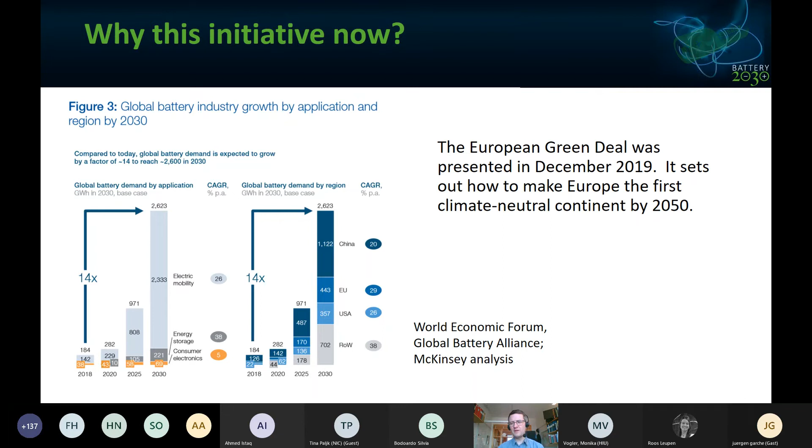The European Green Deal was presented in December 2019, and it sets out how to make Europe the first climate-neutral continent by 2050. This is a super ambitious goal, but we need to reach it, and this is a part of reaching the goal. This also requires that all these types of research activities around the European continent, and also looking out to what is happening in other places in the world, need coordination, and that we do things together and strive together to reach this goal. And therefore we need these kind of umbrella initiatives like Battery 2030 Plus.

So Battery 2030 Plus is a pan-European large-scale research environment that is working together to implement the goals that we have set out in a roadmap. The initiative today comprises 7 different projects, and it involves quite a lot of academy, research institutes, and also industry.

We have these 7 projects. We have BIG-MAP, which focuses really on the combination of computational exploration together with artificial intelligence and machine learning, and also connects this with key experimental techniques in order to create a platform for materials discovery acceleration, to better map and try to predict the behavior of novel materials that will be implemented in these future batteries. It's also connected very much to understanding the interfaces in the battery. BIG stands for the Battery Interface Genome, and the interfaces control a lot of the performance of the battery, but also the safety and the aging. Therefore it's vital to understand this, and this is something we foresee this project will bring.

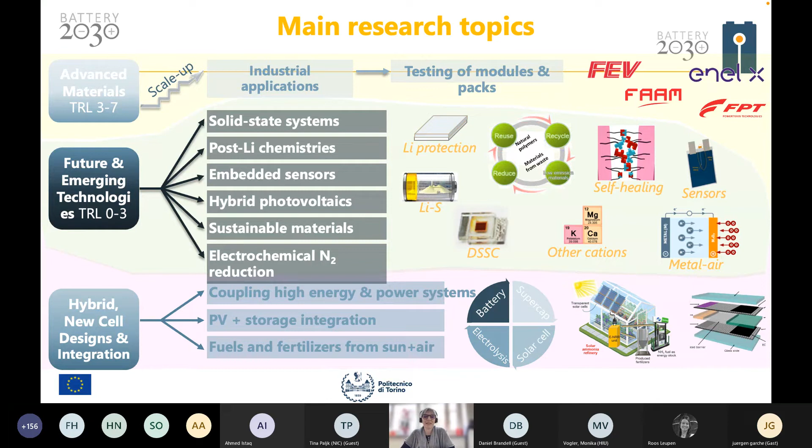We are more than 20 people now, and we are mainly working on advanced materials from TRL 3 to 7, so going from scaling up the production of advanced materials all the way to industrial testing, and also thermal testing and so on. And of course, a big part of our work is in new, future and emerging technologies based on solid state, post-lithium-ion technologies, hybrid systems, lithium sulfur, lithium air, metal air, and so on. And also, of course, as you can see here, self-healing properties of materials and integration of sensors.

Just to conclude, we have a task force at Polytechnic, which I'm proud to lead, as we have expertise across the whole field of engineering. We can cover everything from materials, nanosensors, new cell designs, to all modeling — for example, I'm also involved in Big Map and in several projects on modeling.

And then the integration, battery assembly, integration of batteries in electric vehicles, and also for stationary application, finally arriving to LCA and recycling. Good. So coming into the depth of this presentation, I'll just recap a few basic concepts, very simple basic concepts.

We have principally three different kinds of electrochemical power sources. The first are primary or voltaic cells. These are not reversible systems in which reactants can only transform into products, and there's no way to get them back by producing again the reactants, recharging the battery. So this is not a rechargeable cell, and when reactants are fully transformed into products, there is no other possibility to get additional energy.

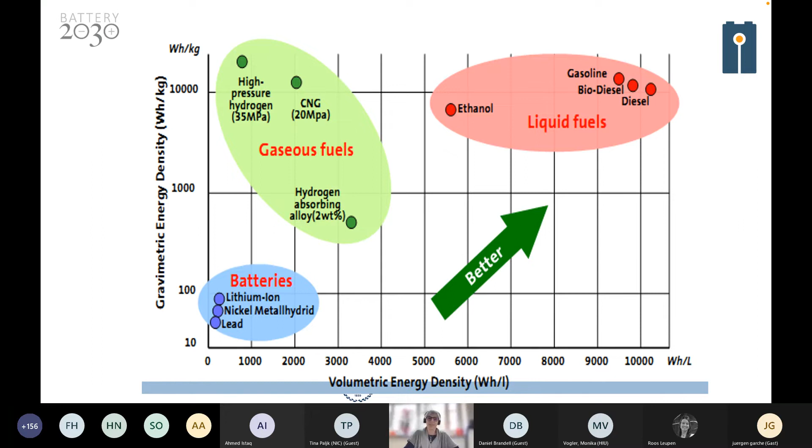So commonly, the main typical cells and batteries we are using are based on lithium. Why lithium? Lithium is the first metal in the periodic table, element number 3, and it's the lightest metallic element of the periodic table. It has a few important advantages: it is very reactive, but it presents the lowest standard electrode potential, -3 versus the hydrogen electrode, and a very huge capacity, around 3,800 milliampere hour per gram. If we compare the specific capacity and standard potential of lithium, you see there is no other cation that can compete with it.

Of course, then we have other issues related to abundancy and so on, which also can give opportunities to other cations such as sodium, for example, but also potassium, whose voltage is quite close to that of lithium, even if the specific capacity is lower.

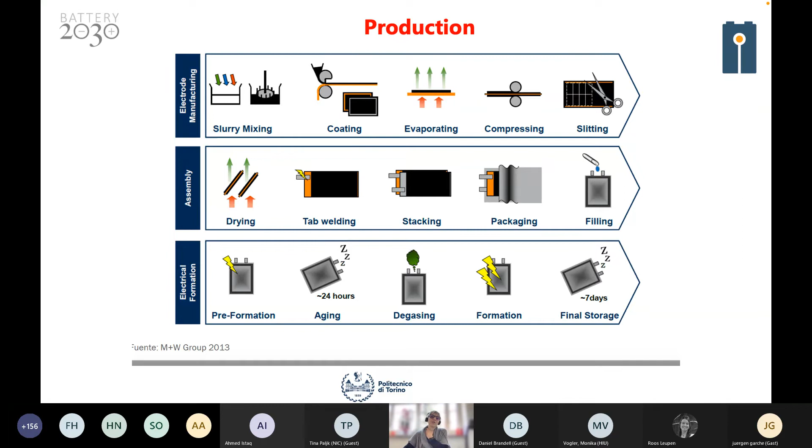Those aspects, even though I just passed through them, each step is really very important and has to be discussed and followed really carefully. So even in Battery 2030, there are a lot of activities in reducing the energy step by step, and rethinking the production of lithium-ion cells.

There are different formats. There are the pouch cells, the ones you already saw in previous slides, in which the electrodes are stacked one on the other. Or we have winding of the electrodes that are rolled around in a cylindrical cell, or finally in a prismatic cell. So there are different formats for different applications. For example, pouch cells are much softer and lighter in some sense. Cylindrical cells are harder due to the case, which is much harder. The same for prismatic cells, depending on the need, and we can have different formats, different distribution of heat during the working of cells, and so on.

Speaking about materials, in principle we have three main types of materials. The insertion materials are the most commonly used in lithium-ion cells. They can be homogeneous or heterogeneous. There are materials in which lithium intercalates inside the layers or inside the lattice of the cathode in a homogeneous or non-homogeneous way. It depends on the material of the cell.

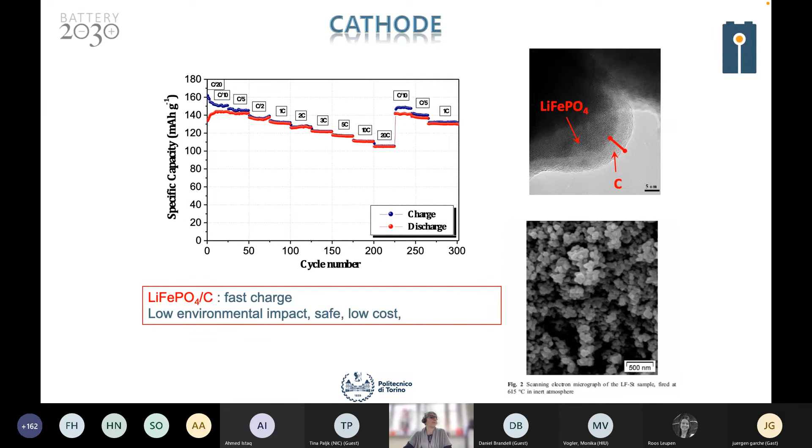So an example is LFP. If you can get a very good carbon layer, as reported here in this nano-sized lithium iron phosphate, you can also reach very high power, as in this case. This is a laboratory produced material, but you can reach 20C. And lithium iron phosphate works commercially very well up to 10C with no particular issues.

As Daniel already reported before in his lecture about Battery 2030, we commonly speak about different generations of materials, of cathode materials.

Now we are in generation 3 with the advanced lithium ion materials, so NMC with the introduction of silicon. We are going to go toward solid state with generation 4. And of course, generation 5 is beyond lithium ion, in particular conversion systems based on metallic lithium, and post-lithium ion technologies, as Daniel reported, like sodium, potassium, and multivalent systems.

I already told you that lithium is very interesting because of its very high capacity, but during cycling it forms dendrites that can be lost. So we have loss of capacity and also short circuit of the whole system.

For this reason, I already told about graphite that can be substituted, but we have to remember that during charge and discharge we have SEI layer formation, which is a solid electrolyte interface that forms always on the electrode surface. This happens in all anodic materials if they have very low voltage, and this is some capacity lost during the first cycle that cannot be recovered during cycling.

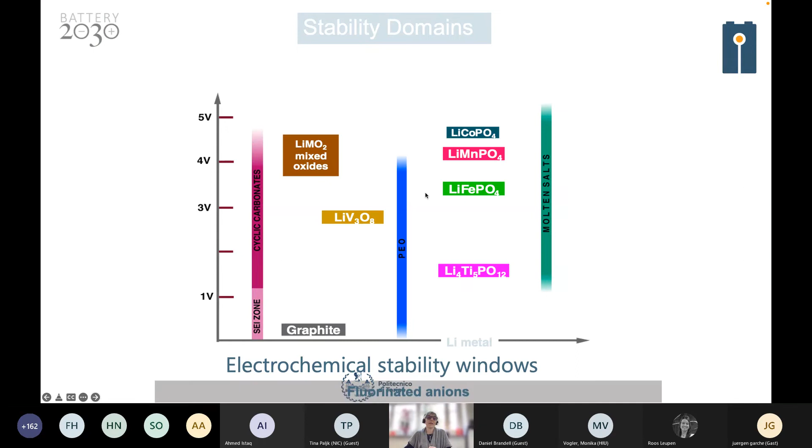So we have many issues related to liquid electrolyte, because of the need to get an electrolyte that can work properly and not decompose depending on the voltage. The higher the voltage, the better it is because of the energy density, but then the stability of the electrolyte cannot be enough. There are a lot of activities done in order to arrive at all solid state batteries, and I will be very fast and leave the floor to other discussions.

Why solid state? When we speak about solid state, we are again speaking about a very wide range of possible configurations: polymer, gel polymer, ceramic, inorganic ceramic electrolyte, but also mixing of all of them.

Why? Because when we eliminate a liquid electrolyte using solid electrolyte, we can use lithium as anode, so it will be protected, and this enables the possibility to increase a lot the energy density, but also you have a reduction of the volume of the whole cell.

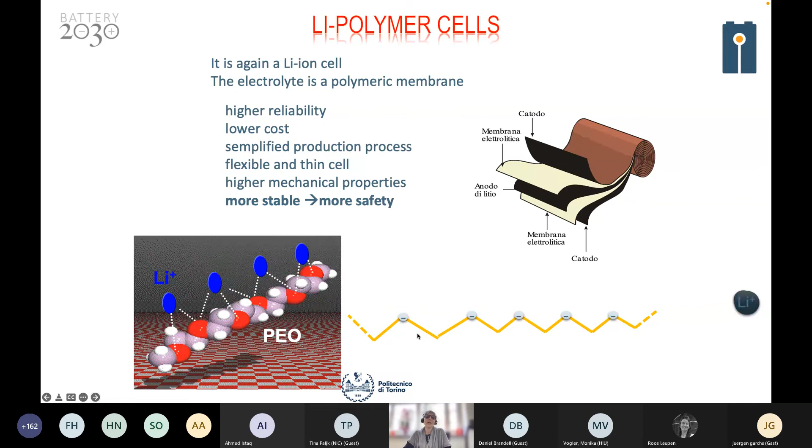That is very, very important for automotive applications, for example. Okay, we have no time to go deeper into how solid electrolyte works. It's commonly based on the presence of some electronegative centers that drive the movement of metallic lithium, of lithium ion, in the cell. Okay, so really going very fast into the second part.

If you have additional questions, of course, I will be very happy to discuss about it. I will leave here just the link to the Tesla battery day where you have additional information.

So just to summarize, I tried to give a very short and very fast overview about lithium-ion cell reaction, the main process in cell production, cathode, anode, and electrolyte materials, and finally, why and how to go toward all solid state.

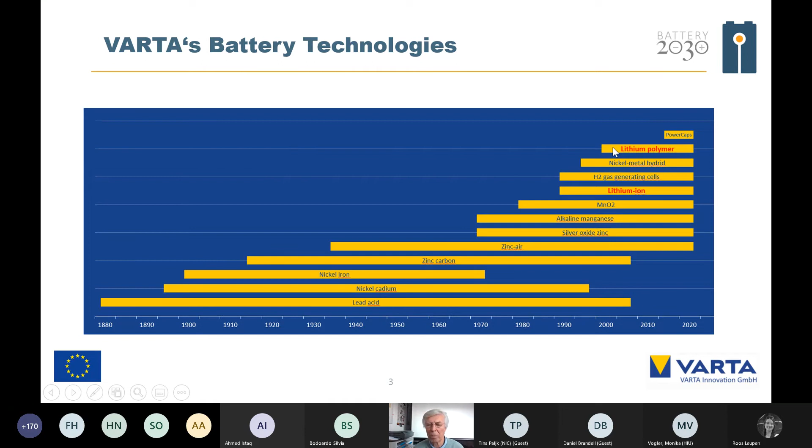Varta has been dealing a long time with different systems, starting 130 years ago with the lead acid battery system, and then in 1990 the lithium-ion battery system was included, and a little bit later also the lithium polymer system. Looking at the different steps of development from scientific research up to the product, the Varta innovation group or department in Graz is working in that area.

So the proven performance of large-scale and full-scale cells are moved then to the larger development, to the full production.

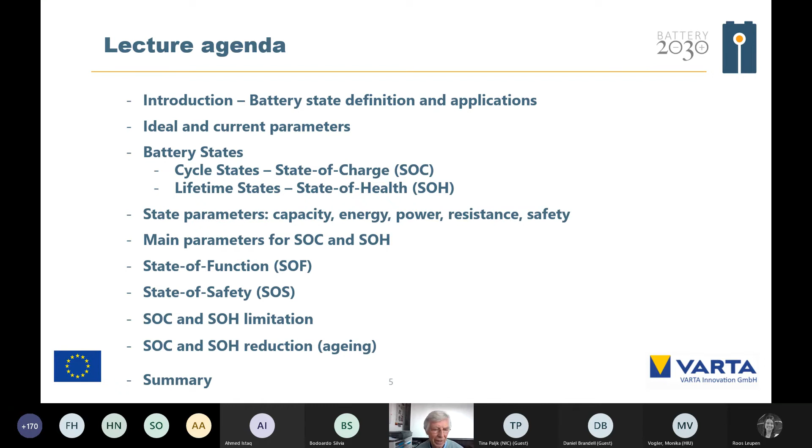The lecture agenda: a short introduction into the battery state definition, and then the battery states. Different states are related to cycles and to the lifetime. Then the question of which parameter we will use to reflect the different states, the capacity or the energy or the power and so on. Then we are coming to the state of function, a relatively new parameter, and the state of safety. Finally, we want to speak about the limitations of the state of charge and the state of health, and what is going on during the reduction of that state parameter, that means the aging, and finally a summary.

The battery state gives you information about the parameter state, and the parameter could be, for example, the capacity of the battery. We have two groups of states: the state of charge during one cycle, which gives you short time information, and the state of health, which is related to the whole cycle life, giving you long time information about the state of the battery.

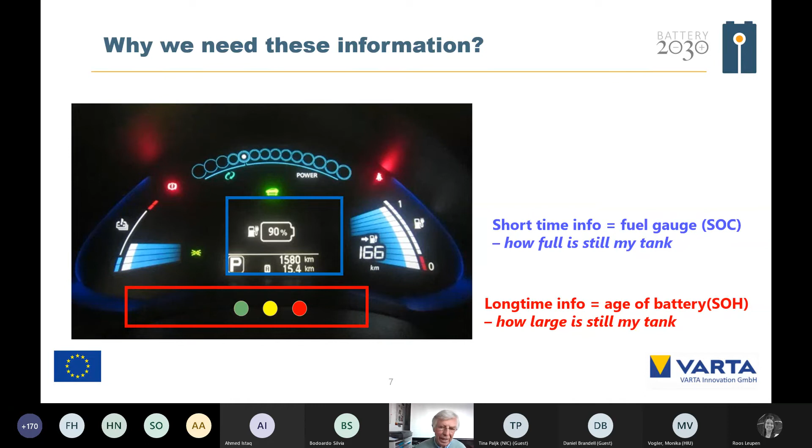Why do we need this information? For example, if you have the screen of your electromobile, you have the short time info, the fuel gauge, the state of charge, which answers the question: how full is still my tank? And then you have the long time info that gives you information about how large is still my tank. Both informations, the short time info (state of charge) and the long time info (state of health), are important for driving the car, and not only for the car, but also for other applications.

The battery state is a metric to evaluate the current parameter level in relation to its ideal state. The current parameter could be related to a cycle, that is the cycle state, the short time info, or to the lifetime, so lifetime state, long time info.

The ideal state could be related to measured values of a fully charged cell, or to a so-called nominal value, which is given by the manufacturer. That is the difference between the ideal state in the cycle, where you measure the value, and for the lifetime value, where the ideal state is given by the manufacturer.

Let's have a look at the short time state. During one cycle, that is the state of charge. That is the ideal value of the fully charged cell, 100% state of charge, and then you have the discharge, and then the charge again. So the ideal value is the measured value at that state, the full charge at the beginning of the discharge, or at the end of the cycle before.

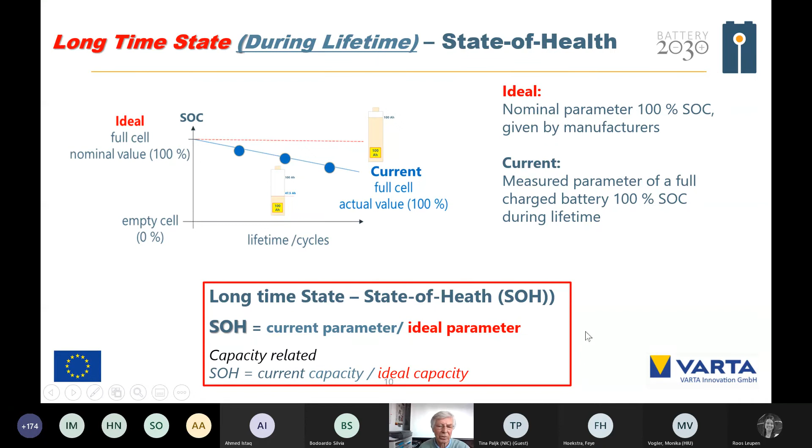So let's come back to the nominal capacity. I mentioned that capacity is given by the manufacturer. That value is based on the experiences of the manufacturer with many cells. He has a lot of experience, measured a lot of capacities, and the average of that measurement he calls nominal capacity, or also labeled capacity or given capacity. So that's the value you're looking at in the prospectus, and then you see I could buy a cell with 100 ampere hour capacity, for example.

But that nominal capacity, given by the manufacturer, is not in every case the same as the measured capacity, the real capacity. One cell could have 95 ampere hour real capacity but is still labeled as nominal capacity 100 ampere hour. The second cell could have more capacity, for example 105 ampere hours, but is also still labeled by 100 ampere hour.

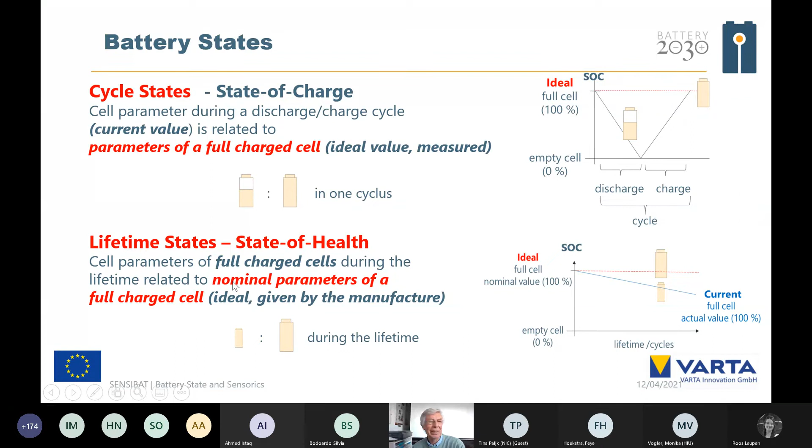And in order to avoid problems with the measured capacity, the long time capacity is related in the ideal state to the nominal capacity given by the manufacturer. So again, for both states: the cycle state, for one cycle, the ideal parameter is in the full charged cell, and that is measured. The state of charge is the value of the parameter during cycling, during discharge and charge, related to the full charged cell. And the lifetime state, the state of health, the ideal parameter is the nominal parameter given by the manufacturer. So the question is which parameter we use to characterize the cell.

For example, during discharge you could measure the capacity, the energy, the power, and the resistance. The same is with the long time state. You have to charge the cell, and then you could measure the capacity, or the power, or the energy. So let's have a look at the cycle state. We could have here the measurement of the capacity, the energy, the power, and the resistance.

In nearly all cases, for the characterization of these states, let's say 50% state of charge, we use the capacity. And therefore, if we are speaking about the state of charge, that means in nearly all cases the state of capacity. That means state of charge practically means state of capacity. So the state of capacity gives you the information about the currently available capacity in relation to the measured capacity of a full charged cell. That means that point.

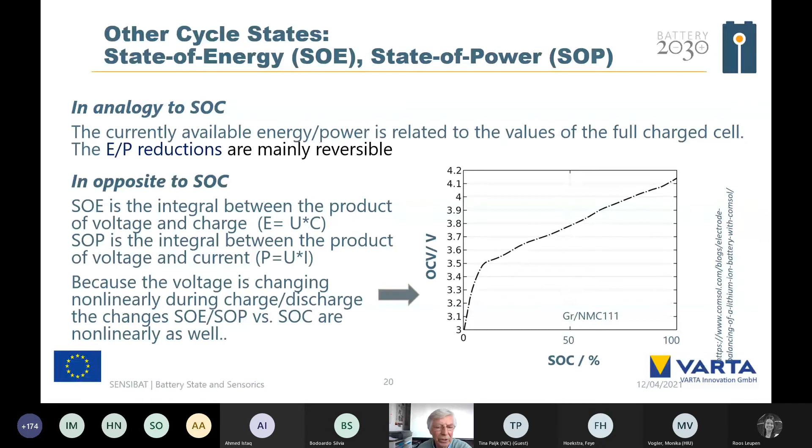So the lifetime state, that means the state of health, is the value to evaluate the health, let's say the aging, in relation to its ideal state. Like with humans, we have different explanations for health. You could look at the skeleton, the blood, the nerves, and so on. And the same we have here for the cell. We have different indications.

Oh, sorry. Oh, moment.

We have different indications for the health. That could be the capacity via the lifetime, the energy, and the power and the resistance. So it's the same as the cycle state. We have here the capacity related to lifetime, the energy, and so on. And also here we use as a parameter to characterize the state of health, the capacity. So also here in the lifetime state, the state of health is practically mostly the state of capacity.

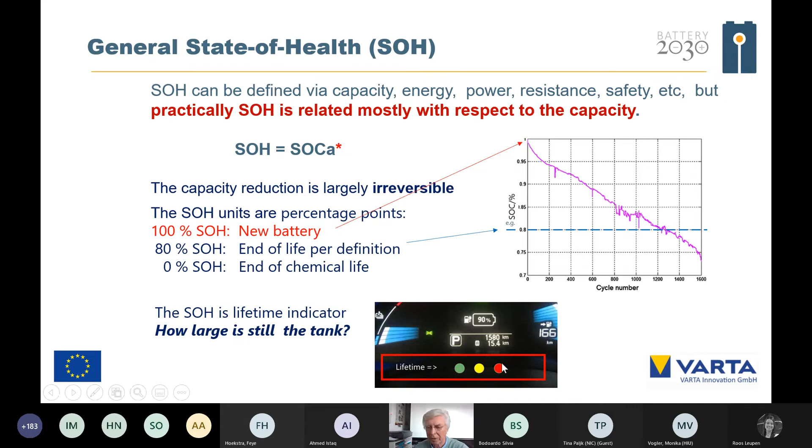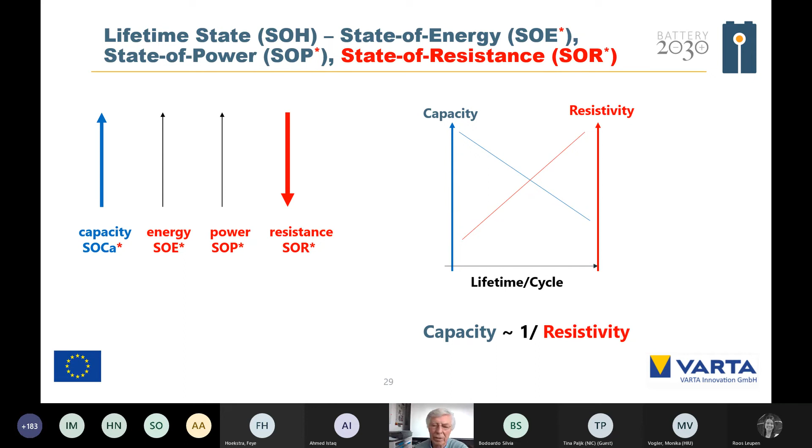So, of course, we could also have other states: state of energy, state of power, and also state of resistance. Sometimes state of resistance is used because, not for all, but for layered materials like NMC and NCA, we have a relation of the capacity to the resistivity, to one divided by the resistivity.

So then a so-called state of function is introduced. State of function combines the state of charge, meaning the capacity during cycling, and the state of health. That state of function answers how big is still my fuel tank and how full is still the fuel tank. In other words, how many kilometers I can drive with my car. So the state of function does not differentiate between the capacity decreasing during one cycle and the capacity decreasing related to aging.

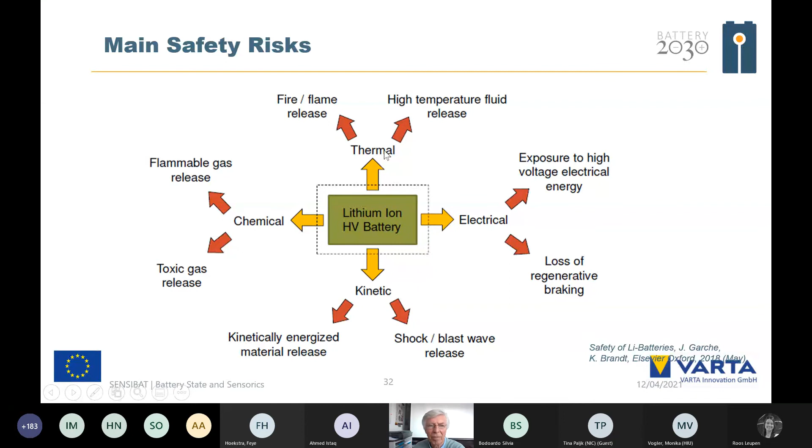So then a so-called state of safety is also introduced. We have a lot of safety risks. I will give a later lecture about safety, and you will see we have electrical, chemical, thermal, and so on risks. The problem for the state of safety is the quantification of the state of safety.

State of safety is used often in the literature, but never defined exactly. There are operation parameter limits which are not to be exceeded, for example the operation window for temperature or for charge rate, and you should not go outside that operation window. Based on those limits—temperature, charge rate—a function could be developed for that state of safety. There's a good publication in the Journal of Power Sources about this.

So, are there any limiting values for state of charge and state of health? Yes. For the state of charge, that depends on the battery chemistry, but normally you should not go deeper in discharge than about 20%. The end of discharge would be here at 80%. Why are we doing that? To stop the discharge here, to increase the lifetime. If you go deeper toward 100% discharge, then the lifetime decreases exponentially.

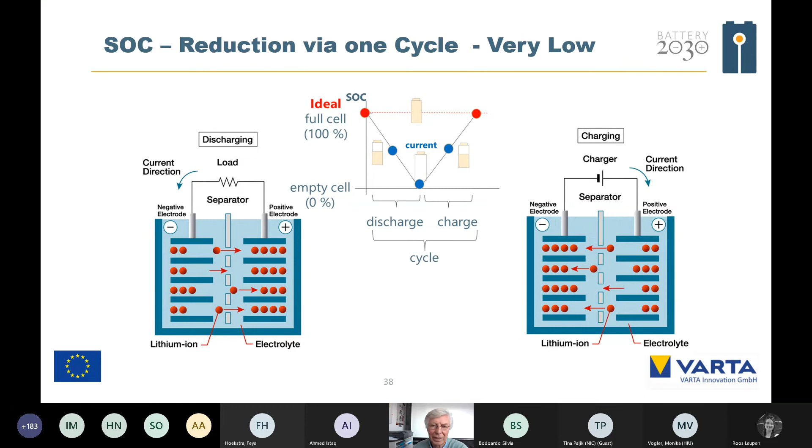And then the last question: reasons for battery state reductions. In the state of charge, normally the reduction of capacity via one cycle—going from that point to that point—is very low, so the changes during one cycle are nearly reversible. That is not the case for the state of health; the reduction over the lifetime is relatively higher compared to the state of charge. The reasons for state of health reductions are the loss of lithium, active mass losses, and reduced charge mobility. I will speak about those reasons in about 30 minutes.

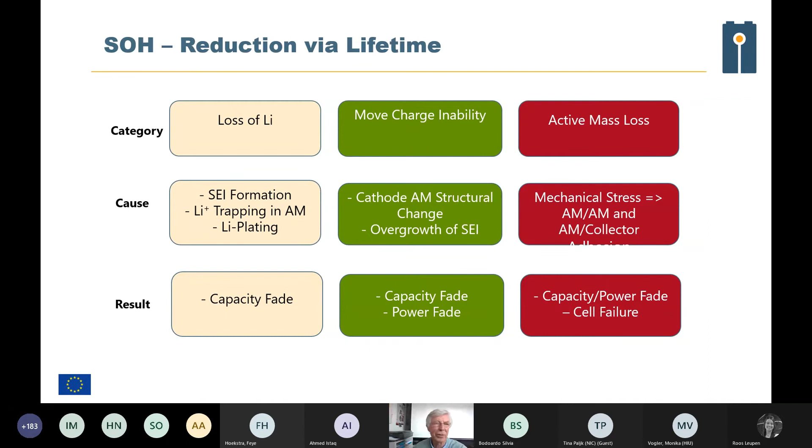Summary: we have the cycle states, short time, mainly state of capacity, which gives the relation between the measurement parameter in the partial charged state, lower than 100%, in relation to the ideal state, which is the measurement parameter of the fully charged battery. So the question was: how full is the tank?

And then you have the lifetime state that is also related mainly to the state of capacity. That is the current parameter, the current capacity of the full charged battery to the ideal state. And then we have the combination of the state of capacity, the state of charge, and the state of health as the state of function, which gives you the kilometers you could drive, and finally also a state of safety.

Thank you for your attention, and please see in September we have in Graz the 4th Graz Battery Days, tools to tackle the challenges of lithium-ion battery technology, mostly related to sensor topics.

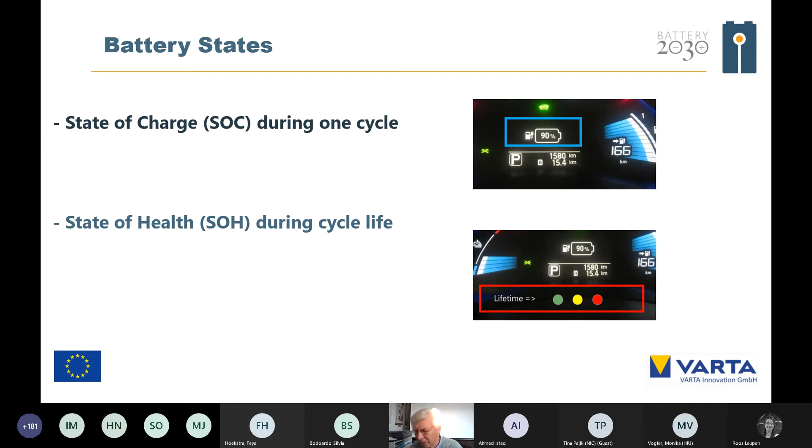As we discussed already in the lecture before, the state of charge during one cycle and the state of health during the whole cycle life. During one cycle, practically we have only reversible changes. I mentioned practically, you have no changes in the capacity during one cycle from Cx to Cx plus 1. Of course you have minimal changes, but practically you could not see the changes during one cycle.

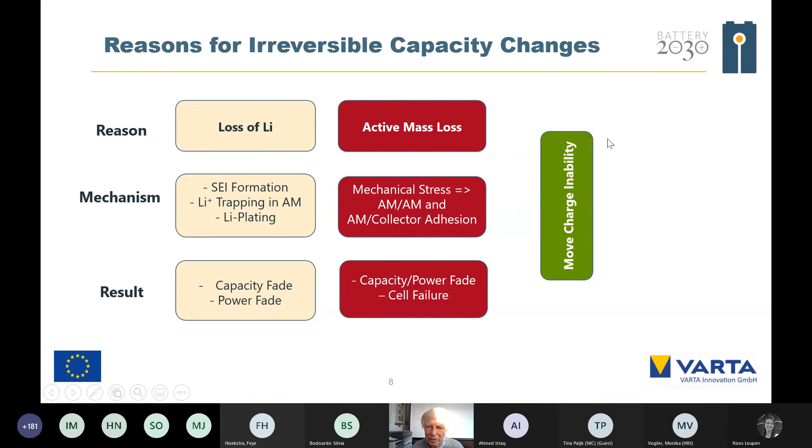So the other state, the state of health, all the changes during the lifetime or the cycle numbers, are irreversible. We have 3 groups for that, and I will discuss only the loss of lithium and active mass losses, and not the move charge inability. We could do that in the discussion, for example.

So the reason for capacity fade and power fade is the loss of lithium in the system. We have two reasons for that, two mechanisms: the SEI formation and the lithium plating. Now I will address the SEI formation.

Starting to understand what is going on with the electrolyte stability, with the well-known example of water. You have two platinum electrodes, and if you go to the lower potential at about 0 volts, hydrogen is generated. In that region, the water is unstable, and going in the positive direction at about 1.23 volts, the water is oxidized to oxygen. So only in that region do we have the electrolyte stability window.

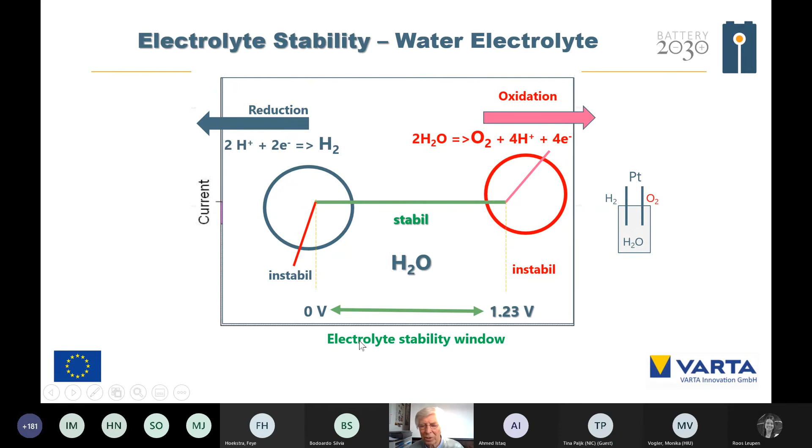That is for water, but we could take the same model or experiment also for our lithium electrolyte, the LiPF6 alkyl carbonate, with two gold electrodes, and we have nearly the same behavior. Going in the positive direction, the electrolyte is oxidized, and going in the negative direction, the electrolyte is reduced. So where we had 1.23 volts for water, here we have nearly a 4 volt electrolyte stability window. That means we have two areas for the stability: the electrochemical window between 1 volt and 4.5, 4.3, or 4.6, depending on the electrolyte.

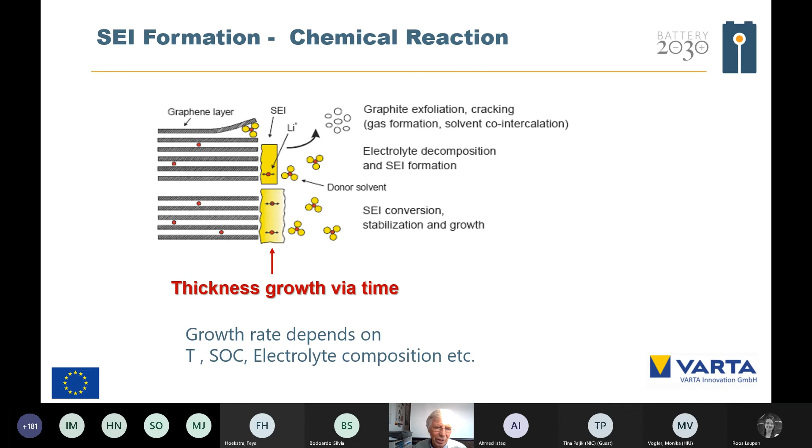By trapping of lithium in the SEI, you could see lithium fluoride, lithium oxide, lithium carbonate - that lithium is trapped, no more free to transport from the anode to the cathode and vice versa. That brings you a capacity reduction. And the increase of the thickness of the SEI leads to an increase of the resistivity of the whole system, which means you also have a power reduction caused by the SEI.

If we have no lithium between those layers - all lithium is outside - then the structure collapses, the layers go together. So we need a part of the lithium as the so-called structure-stabilizing, and the other part is the capacity-forming.

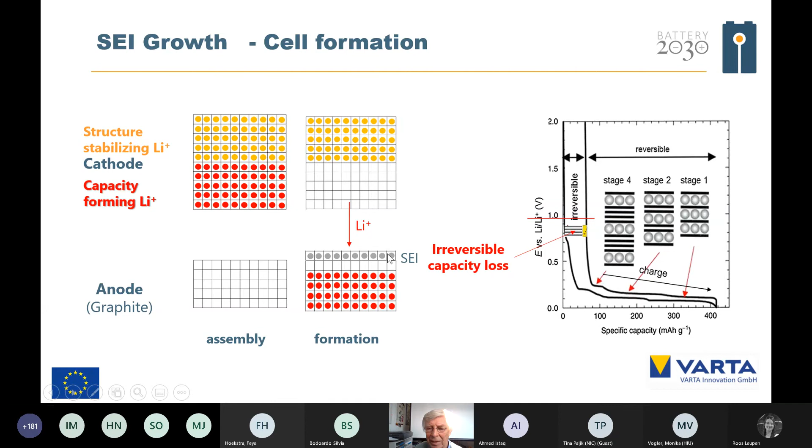If you look at the first charge, that is the empty graphite electrode - you charge it, you come down, and then you go back to discharge it. You have here the so-called irreversible capacity loss, and that irreversible capacity loss is the SEI formed during the formation process.

But during the lifetime, because that is a chemical reaction - and I mentioned that layer is growing independent of charge-discharge - we get a larger and larger SEI, and that means, in parallel, a capacity reduction.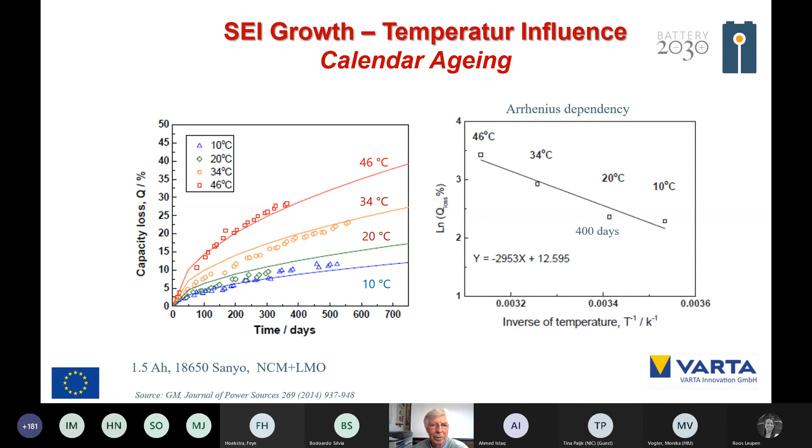And then we have also a third influence besides the temperature and the state of charge: the manganese deposition into the SEI. That is in the cathode. You have manganese 3, for example in the NMC, and especially in case HF is developed from the conductive salt, you have a disproportionation. You have a general disproportionation, but in presence of HF, the disproportionation goes much faster.

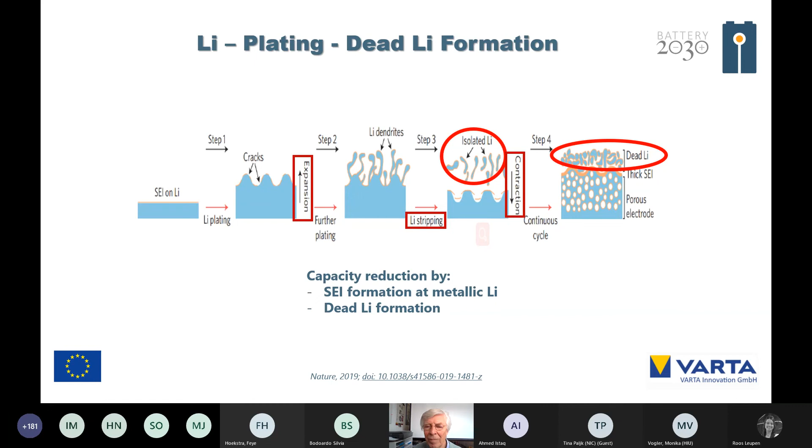On the left side, you have the increased current, or the charging time to 80% state of charge, in minutes. So 10 minutes, that is a very high charge current. And here you have a line. On that side, you will find lithium plating, and on the other side of that curve, that is lithium plating free.

So, for example, if you want to charge your battery in 30 minutes, about 2C, you need to charge your battery at at least 40 centigrade. So if you want a 20-minute charge, your charging temperature should be 50 centigrade.

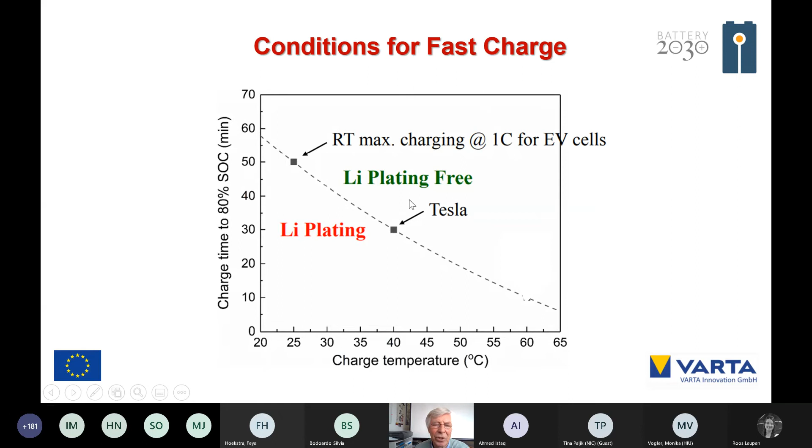And that is exactly what Tesla, for example, is doing to avoid lithium plating. Just before you fast charge the battery, your software is heating up your battery to about 40 centigrade, and then you could charge it with the high charging current.

So that lithium which we have seen is also trapped lithium, and that reduces your capacity.

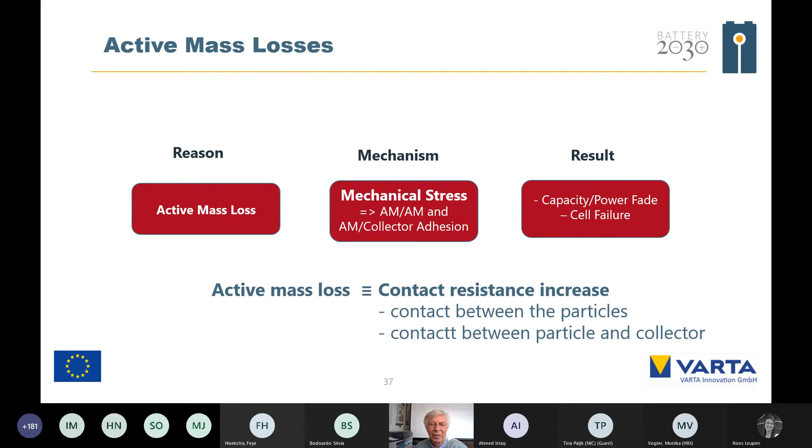So now let's come to the active mass losses. The active mass losses are coming normally via the contact resistance increase. So you have a mechanical stress inside, and that mechanical stress then reduces your contact between the particles, and not only between the particles but also between the particles and the collector.

And also that mechanical problem is well known with the lithium silicon alloys. Silicon has been mentioned to have a high volume change in case of charge and discharge. That is the volume for the charged one, and that is for the black one, for the discharged one, and that for the charged one.

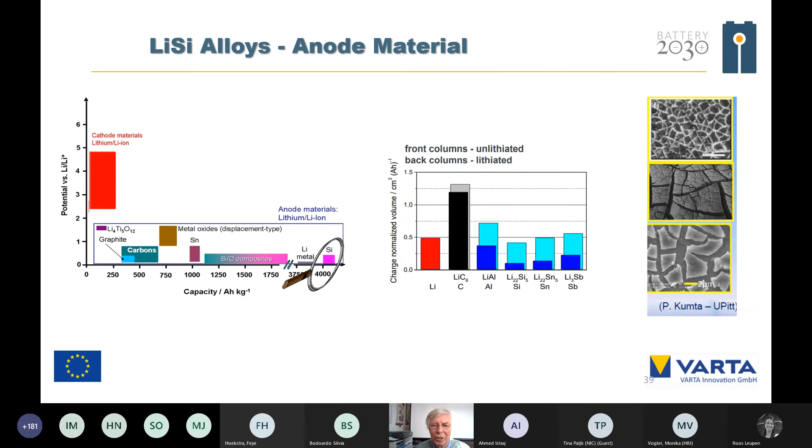For the graphite, the difference is only 10%, but look for that, for the alloys the difference is about 40%. So, after some cycles, you have an electrochemical milling, so you have no more contact. That is active mass loss.

That is an example for the lithiation of a silicon. What you see here is a silicon. You could see the lithiation of the silicon, the increase of the volume, and that will bring you a higher volume and mechanical problems.

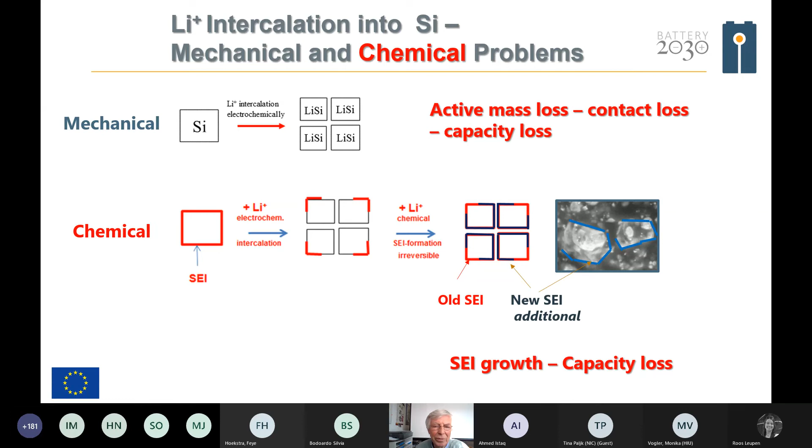Besides the mechanical problems, which lead to contact losses and capacity loss, you have also chemical problems because you create a new surface which is not covered with the SEI. So you have to form a new SEI after the charge of the silicon, and that new SEI means again capacity loss.

So you have practically no volume change. So you have low pressure on the separator, and that is a very stable structure in the LFP, and you have longer cycle life in that case with LFP batteries.

So, if you look, for example, at the lifetime of LFP cells and layered material cells, you could see the advantage of the LFP, which compensates all those volume changes from the anode and the cathode, and that is not the case for the layered material.

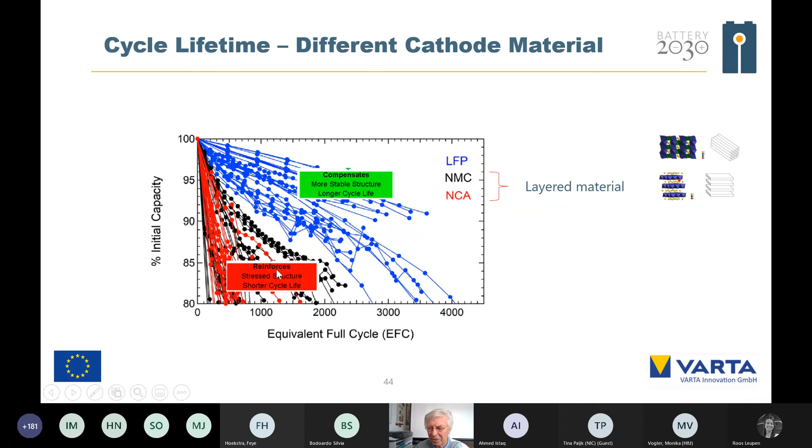So then a short introduction to the layered material in charge and discharge. The discharged material has a lot of lithium between the layers, and if you charge it, then you de-intercalate the lithium from that structure. So you have lower lithium ion concentration.

And as expected, if you take out delithiated material more than in that case, the structure could collapse. But you could try it. And if you go to higher charge potentials, you could see that your capacity is increasing. But the end of charge, 100% state of charge, is given by definition, not by physics or chemistry.

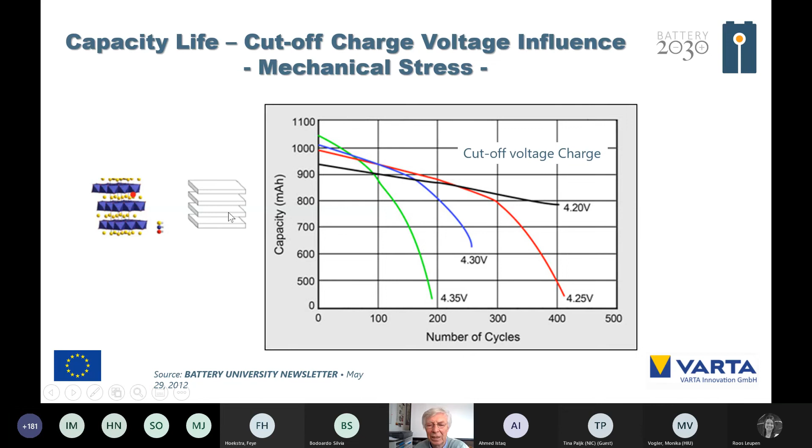Because if you are going to higher values or higher de-intercalation, your structure is no more stable, and the lifetime is decreased. Therefore, all experts give us the upper charge voltage, for example 4.2 volts. If you go to higher values, you are using a part of the structure stabilizing lithium as capacity-forming lithium. You get a higher capacity, but lower lifetime, because the structure starts to collapse if too much lithium is de-intercalated.

Now a short information on the temperature influence. The lithium trapping, mostly the SEI formation, is increasing with increasing temperature. Here you see the logarithm of the aging rate. By our knowledge of the Arrhenius law, we could expect the aging rate to decrease if we go to lower temperatures. That is the expectation, and we know the SEI formation follows that direction.

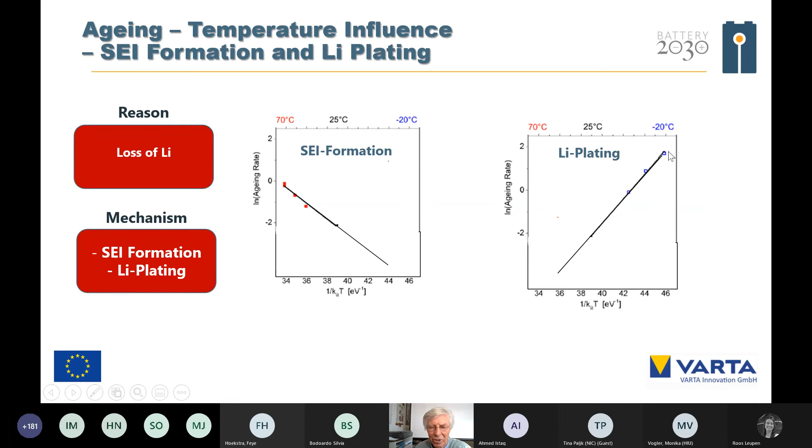But the lithium plating, we know, at low temperature we have very high lithium plating going in the other direction. So altogether, for the influence of temperature on the aging rate, we have a minimum, formed on one side by the SEI thickness growth, and on the other side by the lithium plating. So we have to keep in mind that there is an optimal temperature range where we have the maximum cycling life. If you go to deeper temperatures, the cycle life goes down, and also at higher temperatures.

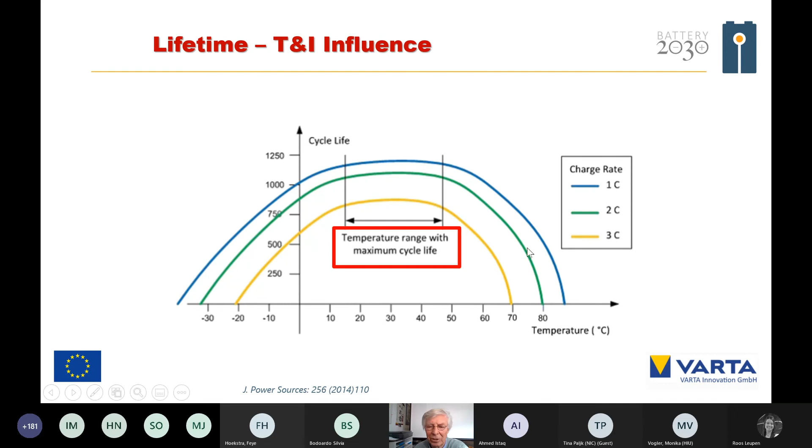Here you have a combination of temperature and high current in the different degradation mechanisms, which you could read here. I don't want to go too deep into that mechanism, but we have the three degradation modes: the loss of lithium, the loss of active material, and capacity loss and power fade.

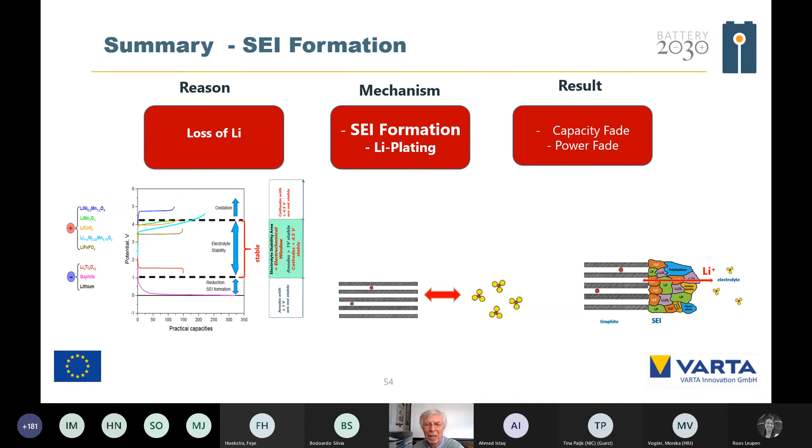In summary, we have the loss of lithium by SEI formation outside of the stability window of the electrolyte, and we have lithium plating if we come with our charge potential lower than the lithium electrode potential. That lithium plating leads to dead lithium and reduced capacity. For active mass losses, we have mechanical stresses in two different systems: systems with low stress, like LFP, have a longer lifetime, compared to systems with higher stress, like the layered materials NMC and NCA.

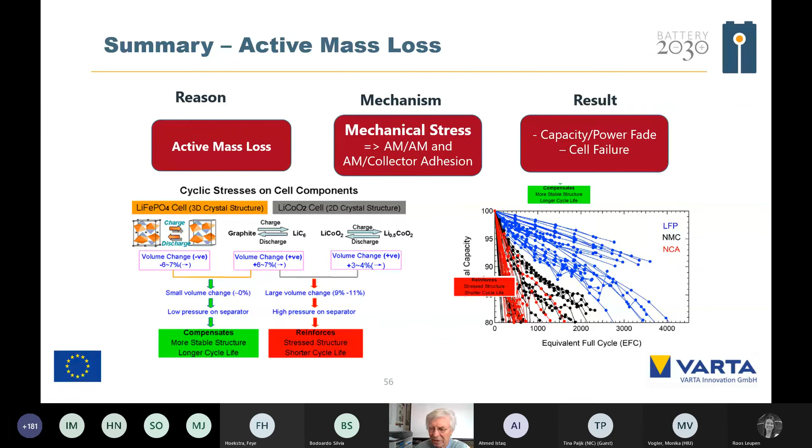So, summarizing the temperature influence, you could see here it is not as we expected. Low temperature could be very good for aging—no, this is not the case, caused by lithium plating.

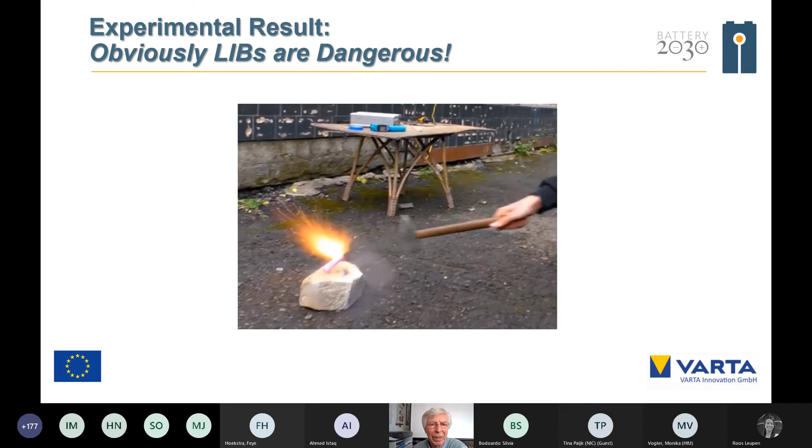What we learned, obviously, is that lithium-ion batteries are dangerous if you do that experiment, of course. I learned that at one of the conferences, a leading person asked: is the lithium battery a controlled bomb?

If you look at the energy density of TNT and the energy density of a lithium-ion battery, it's not too high in specific watt-hours per kilogram, so we are in the same region as TNT. But don't worry, chocolate has much more energy than the lithium-ion battery and TNT. So you notice: high energy densities do not pose an inherent explosion risk.

In general, we have to say lithium-ion batteries are dangerous, but only outside of the operating window, which I mentioned already. You have the standard operating windows given by voltage, current, temperature, state of charge, and that is relatively well controlled. Then you have environmental factors—water, mechanical forces, high temperatures—which are poorly controlled, like mechanical forces from accidents and so on. So here we have such operational design failures.

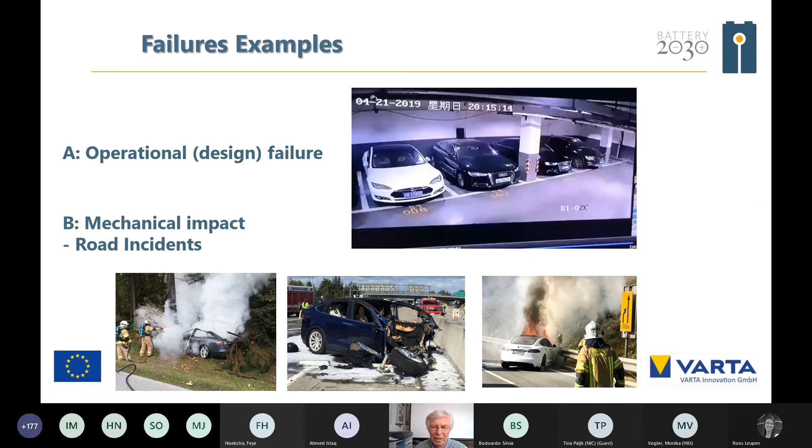And then we have the mechanical impacts, the road incidences. We know that from Tesla, and not only Tesla, also other incidences. But the question is, what about the internal combustion engine cars, the gasoline, diesel, and so on?

In the States, every 2 minutes there's a car fire. In Germany we have about 70 internal combustion engine car fires per day. 40% is the electrical installation, 40% is related to the engine, and 20% in Germany is vandalism. Maybe in France it's a little bit more, but about those 70 internal combustion engine car fires, you would not read every day about that in the newspaper. But if one electric car is burning, then you could read that.

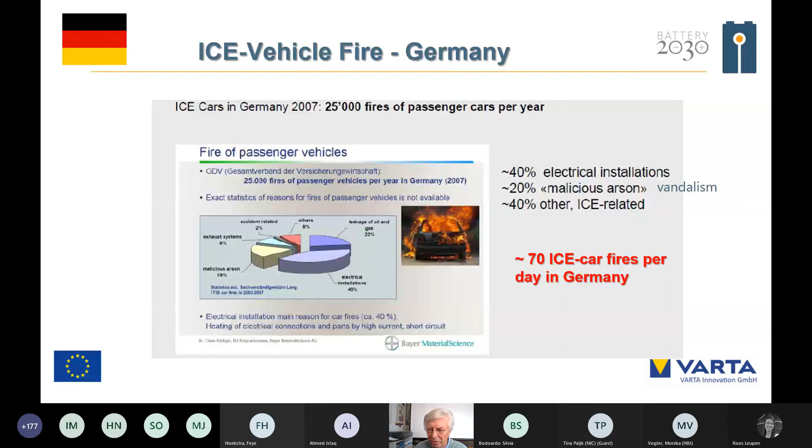So in general, I have to say, the lithium-ion cells are safe as long as you are working in that operational window. The incident rate is lower than 0.1 ppm.

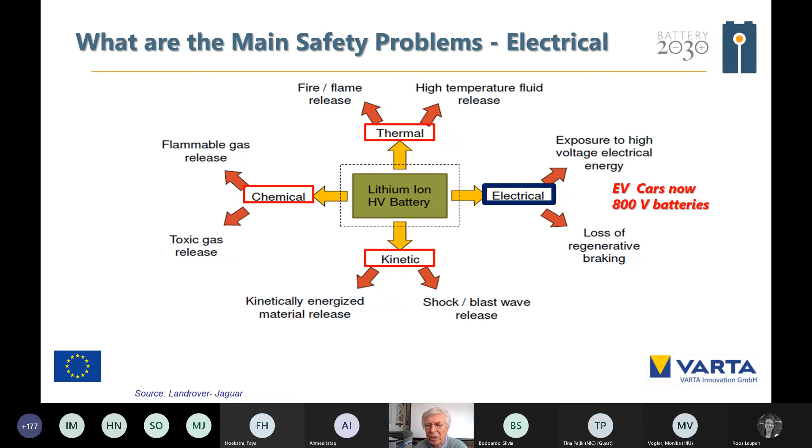What are the main safety problems? You have seen that already. You have the electrical problems. Electric vehicle cars now have 800-volt batteries, for example.

the energy density of the chocolate is much higher. The question is why? There is a so-called Berthelot-Roth product, which gives you information about the explosion risk. And that Berthelot-Roth product is proportional to the gas products, to the volume of the gas products which are developed during that accident, multiplied by the reaction enthalpy.

And here we have different examples. Lithium with the inorganic electrolyte, lithium cobalt oxide, and number 5, that is black powder. And here we have the explosion limit.

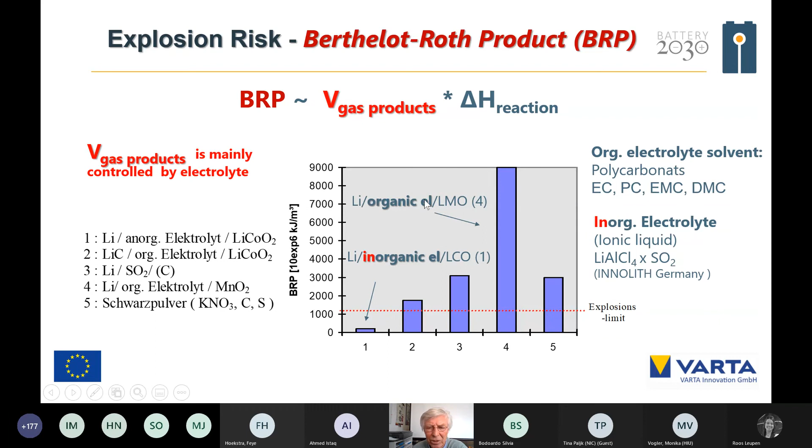I will address 2 examples. We have the lithium organic electrolyte, LMO, with that very high product, and the lithium inorganic electrolyte. That inorganic electrolyte is the ionic liquid with lithium tetrachloroaluminate, and the SO2 ionic liquid is produced in a demonstration by INNOLITH in Germany. And you could see the inorganic electrolyte does not develop so much gas volume like the organic electrolytes, the polycarbonates.

Therefore, the explosion risk of that organic electrolyte is much higher than the explosion risk of nearly the same cell with the inorganic electrolyte. And the explosion risk caused by low gas volume is like the chocolate, because the volume of gases is very low in the reaction phase.

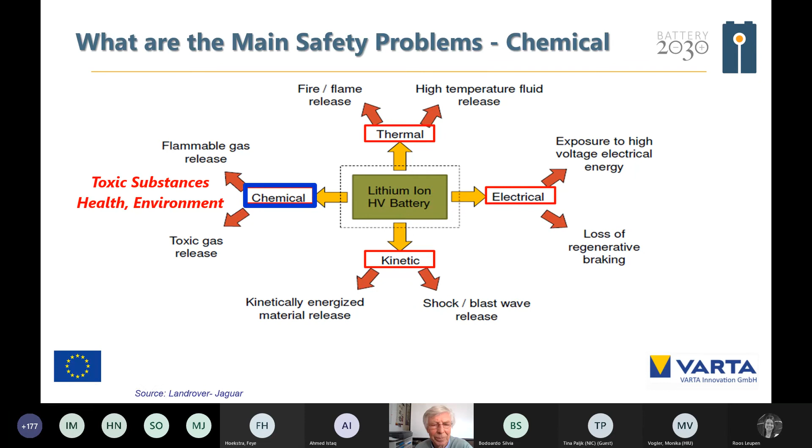So the third hazard is the chemical hazard, which is related to toxic gases, toxic substances affecting health and environment. So the main chemical risk is coming from the electrolyte. And we have 3 cases.

We have a cold leakage, that would be a leak at low temperatures. What we could see here, we have HF formation. And then we have high temperatures, but no fire. So we have gas development and cell pressure, flammable gases, toxic gases. The vent opens, controlled.

And then we have case C, that is fire. The container is opened, mostly uncontrolled, and gases ignite. And toxic gases, the CO, HF, those are the hazard gases. So that would be an example for that one.

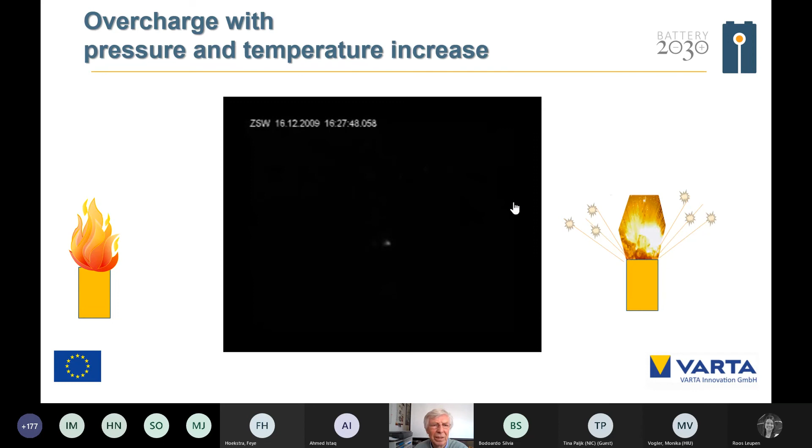The pressure is increased in the overcharge, and you could see that here. And finally, after the fire, you have the explosion.

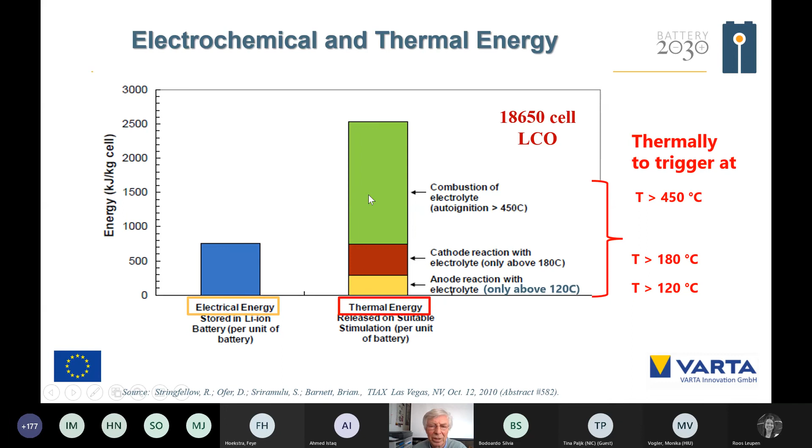The electrical energy could be converted, in case of a short circuit, into heat as well. And if you are looking at specific heat capacity and specific energy, you have a relation of about 720 Kelvin. That means a 1% state of charge loss in the short circuit increases cell temperature by 7.2 K. And if all electrical energy is reacted, then you have a cell temperature increase of 720 K. That is under adiabatic conditions.

That is not realistic practically, because you also have thermal actions. But that short circuit reaction of the electrical energy heats up your cell, it acts like a lighter. The energy created by that lighter heats up the cell temperature, and then the chemical reactions are triggered at a temperature of 120 centigrade.

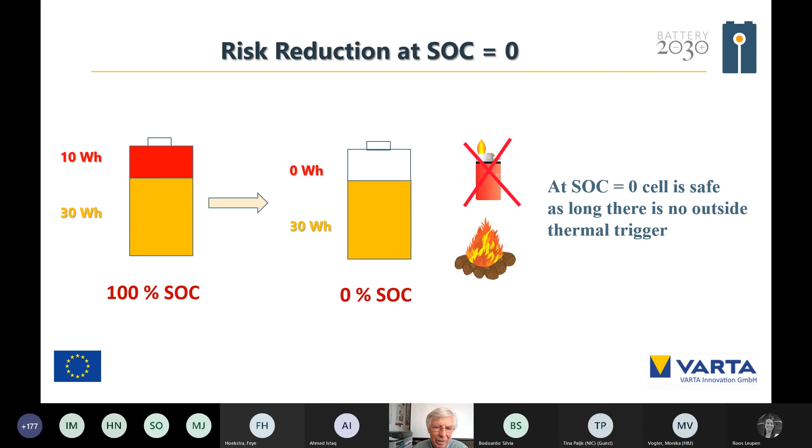So now you could say, okay, let's discharge our cell, then we have no lighter to trigger the chemical energy. That's right, as long as there is no outside thermal trigger. And that is not the case in every situation, so a thermal trigger is needed to come to higher temperatures.

As mentioned, you have the internal short circuit and the external short circuit, where the electrical energy is converted into thermal energy. Then you have operating parameters outside of the operating window: overcharge, deep discharge, external heating, and so on. That means you have a temperature increase, and then you could come to the anode SEI reaction, thermal decomposition, and burning of the electrolyte.

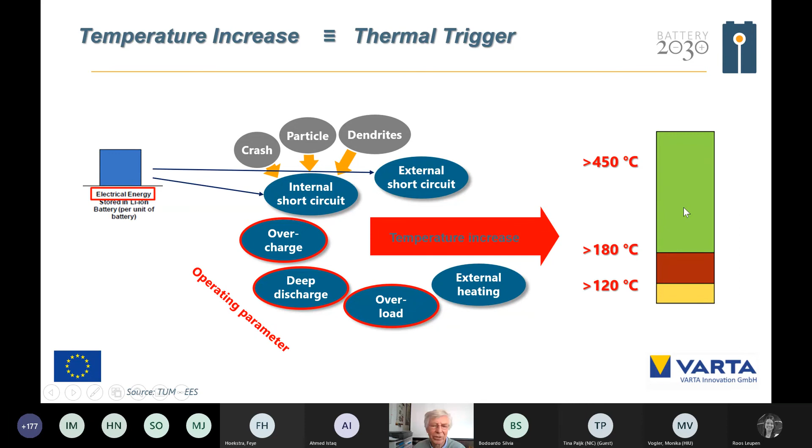So let's look theoretically. We have a thermal input. Physically, the temperature is increasing, at about 100 centigrade the vent is opened by the boiling point of EMC. And then if the temperature increases further to about 120 centigrade, the anode SEI reacts with the electrolyte. That is an exothermal chemical reaction, about 300 kilojoule per kilogram of cell.

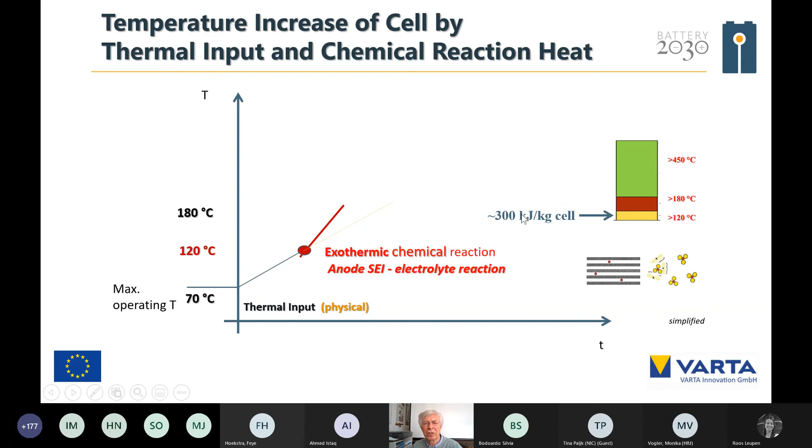At temperatures lower than 120 centigrade, you have here the original SEI. And if you come to temperatures of about 120 centigrade, organic SEI compounds, you could see that here, the organic metastable compounds are dissolved. So the primary SEI is decomposed.

And then you have again the possibility that the electrolyte reacts with the lithium graphite. And then the secondary SEI is formed only with inorganic components, also in an exothermic reaction. So that means, caused by that reaction, the cell temperature is increased.

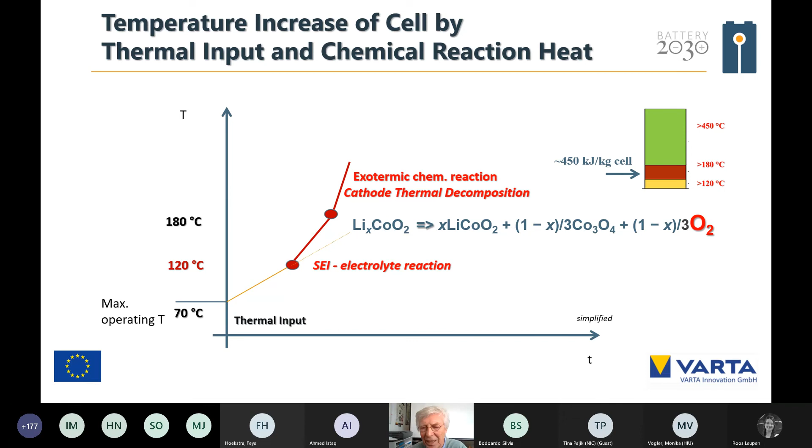And coming to about 180 centigrade, that is the decomposition of the layered material. So the LCO, for example, or the NMC, is decomposed to lower oxide values and to free oxygen. Free oxygen, that means it's like gasoline in a fire. And that free oxygen reacts immediately with the electrolyte and also with the graphite.

So you will see in that temperature diagram, via the time T1, that is the SEI decomposition. Here is the decomposition of the cathode material, and then here the oxygen reacts with the electrolyte and the graphite, and you come to a very high temperature, which we call thermal runaway.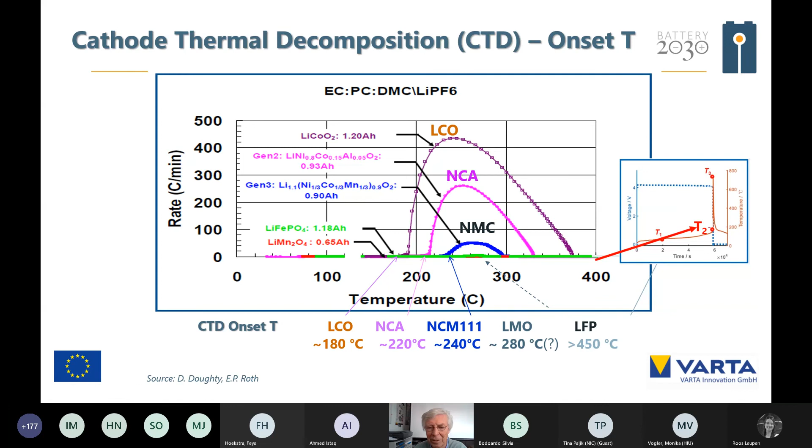And you know the development of the NMC. We are coming from the 1.1.1 to the 8.1.1. It's a higher capacity, very good. But the thermal stability is decreased as well. So we have higher capacity but lower stability.

And what the developers are doing, they are working with layers on the nickel material. So, if the temperature is increasing, we are coming to the electrolyte combustion with a very high enthalpy value. We can repeat that or have the cell here.

We have done that. Burning with the Bunsen burner. Here the vent is open, and now we are coming to the decomposition of the cathode material.

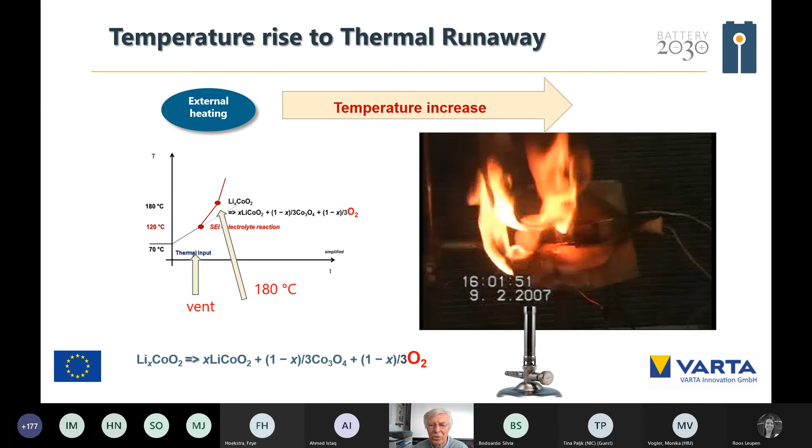At that point, the cathode material was decomposed, the oxygen was generated and reacts with the electrolyte and with the cathode. And you could see that again here: that is the SEI electrolyte reaction, cathode decomposition, and here the electrolyte combustion leading to a thermal runaway.

You could measure that with the accelerating rate calorimetry. The box is heated from outside heaters, and here you have your cell, even a battery if you have a larger cell, and the sample has a temperature sensor. Then you're heating up the outside box temperature - no reaction, going to a higher temperature step by step, no reaction.

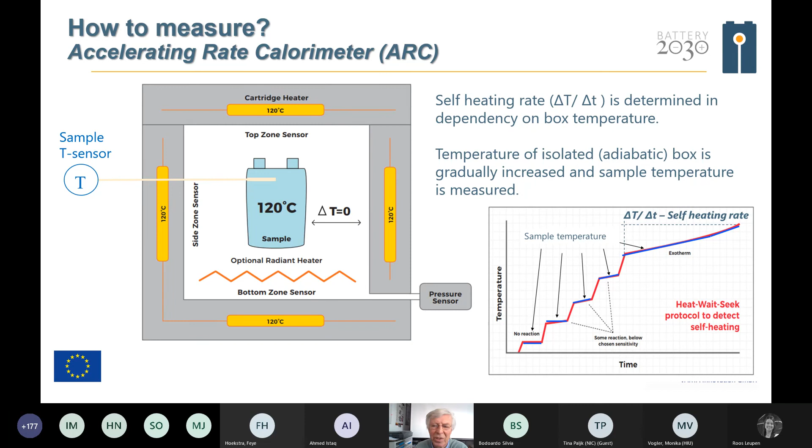And here you measured the increase in the temperature of the cell, and then you get the information that at that temperature we have a chemical reaction inside the cell. The self-heating rate is increased. So that is the so-called thermal runaway.

Then, if you come to the burning of the electrolyte, thermal runaway, we will observe if the generated heat in the cell, generated by combustion and cathode decomposition, is higher than the cooling rate. Cooling rate is stable here, and here we have that relation - the heat generation is larger than the cooling rate. So that leads us into the thermal runaway.

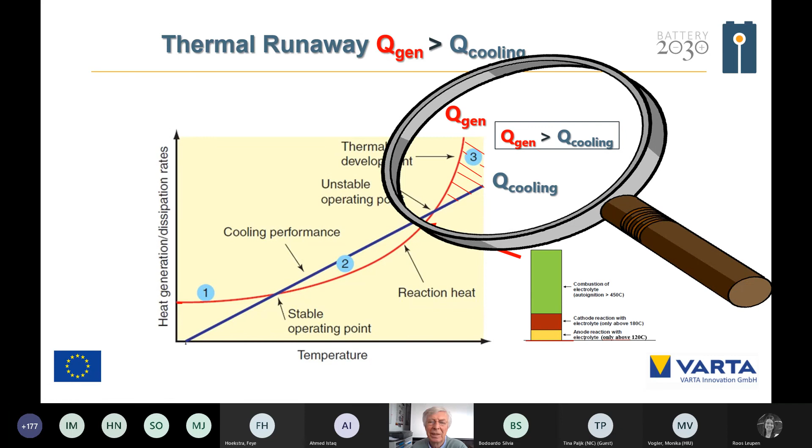What we could do to avoid the thermal runaway: we could use non-flammable electrolytes, that means to decrease that area. And otherwise, we could increase our cooling by cooling the systems with air, with liquid. And we could also look for larger cooling areas.

If you have a small cell, the volume of the cell, so the active mass, determines the heat generation, and the area of the cell determines the cooling rate. In the case of a 2 ampere hour cell, the volume to surface ratio is 1:1. For larger cells, so 40 ampere hour cells, the volume is about 20, and the surface is only 7. So the cooling area is reduced by a factor of 3 for a 40 ampere hour cell in relation to a 2 ampere hour cell.

So to prove the state of safety, we are doing safety tests. A safety test has the excitation of the cell: mechanically, electrically, thermal, crash, short circuit, thermal stability test. There's a lot of different excitations and therefore a lot of different testing conditions. You could see that here: external short circuit, abnormal charge, forced discharge, crush, impact, and so on.

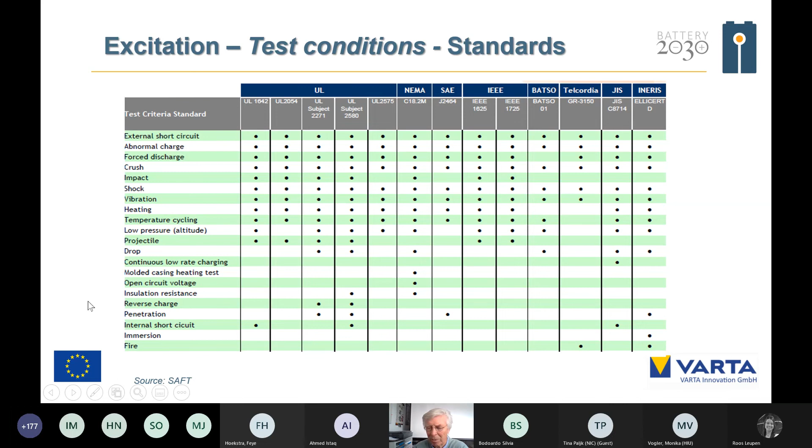You are looking after the excitation to answer: voltage, current, gas, toxicity, volume, pressure, mass loss, and fire explosions - those are the answers. And the Sandia National Lab has developed such a hazard level figure, which is also used by EUCAR.

And you have the different test results which are related to hazard levels. For example, electrolyte loss lower than 50%, that is hazard level 3. Electrolyte loss more than 50%, level 4. Venting, level 4, and so on. And fire and flame, 5, 6, and explosion, 7.

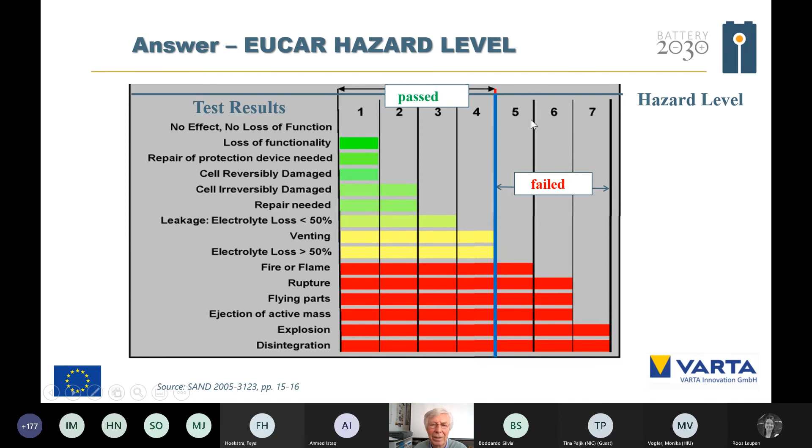And up to here, hazard level 4, all tests are passed. If you have a hazard level of 5, then the test is failed. So that is the summary of the introduction.

Now you have causes: external short circuit, internal short circuit, overcharge, that heat up the temperature of your cell, bringing up the temperature of your cell. And then you have two possibilities.

Your cooling is larger than the generation heat, then you have a safe outcome. But in most cases, your generated heat is higher than the cooling rate, and then you are coming into thermal runaway, venting, rupture, fire, and explosion.

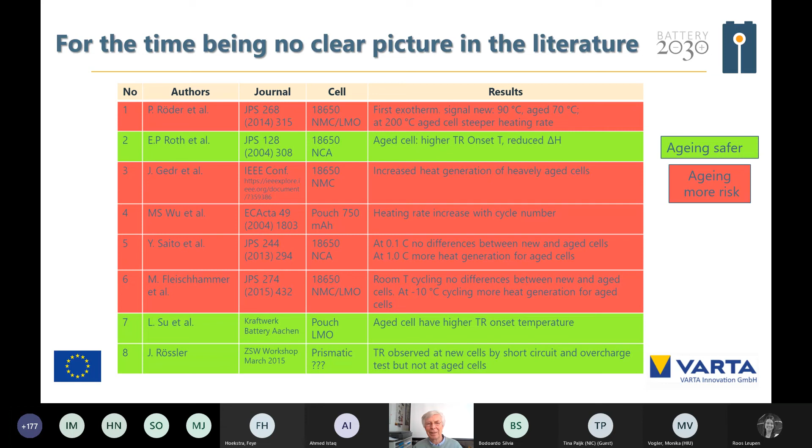And now we are coming to the aging influence on safety. So does aging also bring a safety problem? I have to tell you in the beginning, for the time being we have no clear picture in the literature. Some literature shows that after aging the cell will be safer, and other literature shows aging brings more risk. I could bring you many more examples showing both green lines and red lines. So it's not really clear how aging influences safety.

If you look at aged cells, you have a capacity and energy loss. You know that, of course. And the result is lower electrical energy. So from the safety point of view, capacity loss from aging should bring a safer state of the battery.

You could see that here, for example, that is the state of health or state of charge. If you have 100% state of health, you have a lot of cathode material which could decompose, and then the reaction starts. If you have a low state of health or low state of charge, your heat generation is reduced. You could see that here, that is the maximum determined runaway temperature. It depends on the state of charge and also the state of health. If the cell is discharged, the maximum temperature is 300 centigrade, and in full charge you have 900 centigrade.

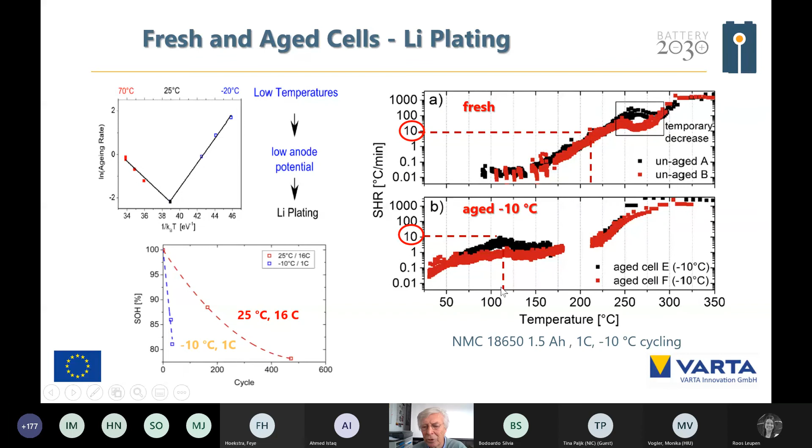And that shows you the aged cell after the ARC measurement, so this exploded. Normally in that case, you could see here from the colleagues from Münster, the self-heating rate for a fresh cell is here, and for the aged cell, aged at 70% state of charge and minus 10 centigrade, is here.

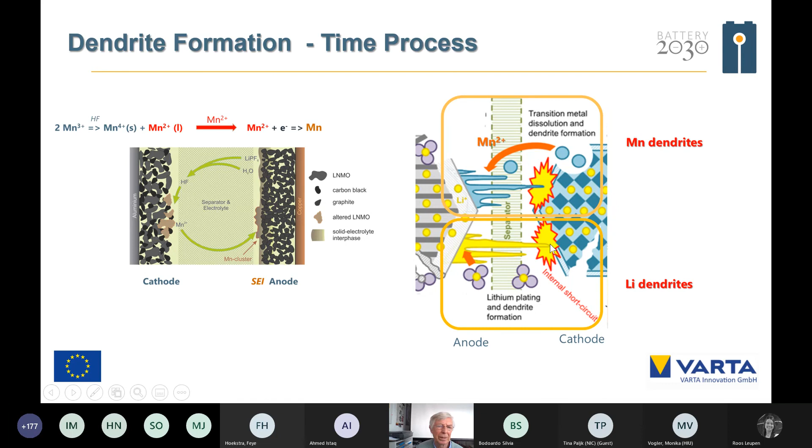And then we have the dendrites, the short circuit, which brings you more risk. We have discussed the possibility of manganese shorts. You could see that manganese dendrites could go to the cathode, and also lithium could go to the cathode, and also copper could go to the cathode.

So we have the inhomogeneous deposition caused by inhomogeneous SEI. We have the growth of the dendrites, and the dendrites could go up to the cathode.

So that is the example, a demonstration of how the lithium dendrites are growing. You could see that here in the mossy structure, very fast.

So not every dendrite gives you a real short circuit which heats up your cell. That depends on the length of the dendrite and also the diameter. The dendrite resistivity depends on the diameter - if the dendrite diameter is larger, then the resistivity decreases, and with decreasing resistivity, the short circuit current increases.

So we have here, for example, two cases: the diameter of the dendrite is 0.1 micrometer here, and 1 micrometer here. In this case we will have a thermal runaway, and here we will have no thermal runaway.

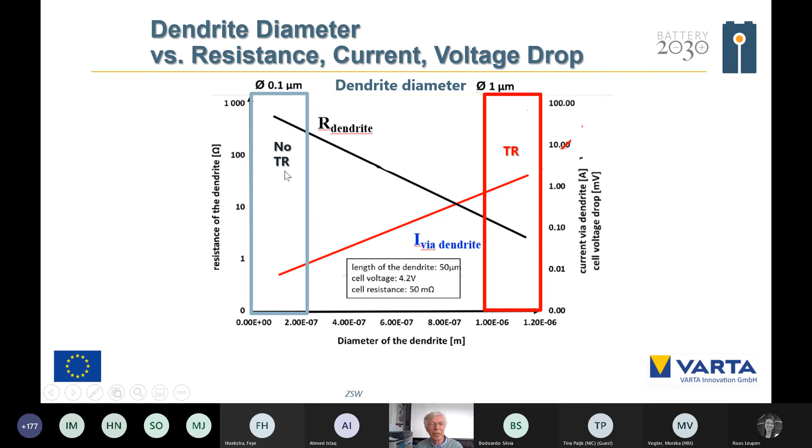The voltage, if you have a short circuit, is normally going down. Here we have an example, not in every case we find this: the dendrite is burned down. The dendrite comes to the cathode, the voltage goes down, the temperature increases, and the temperature becomes so large that the dendrite peak is interrupted, so you have no more short circuit.

Otherwise, if you have continuous contact of the dendrite with the cathode, the voltage goes down and the temperature increases, and you come to thermal runaway.

So that results in different influences of the operating parameters on the aging reaction. Capacity and energy loss depends on time, cycling condition, and open circuit voltage, same as in formation. Lithium plating depends on state of charge, as we showed, on temperature and current. Lithium dendrites depend on cycling behavior, current and potential. Because operating parameters can change from case to case, the aging reactions also change.

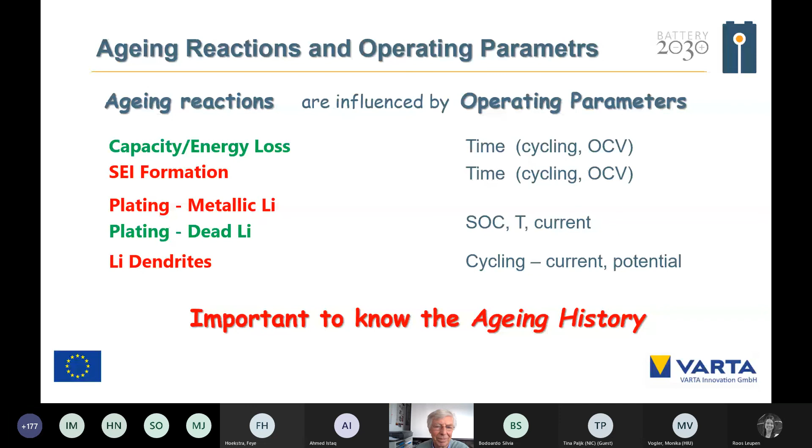Therefore you need to know the aging history: what was going on in the first 100 cycles, at which temperature, with which current, charge and discharge, and so on. Then you could nearly say which of the parameters take influence on your safety.

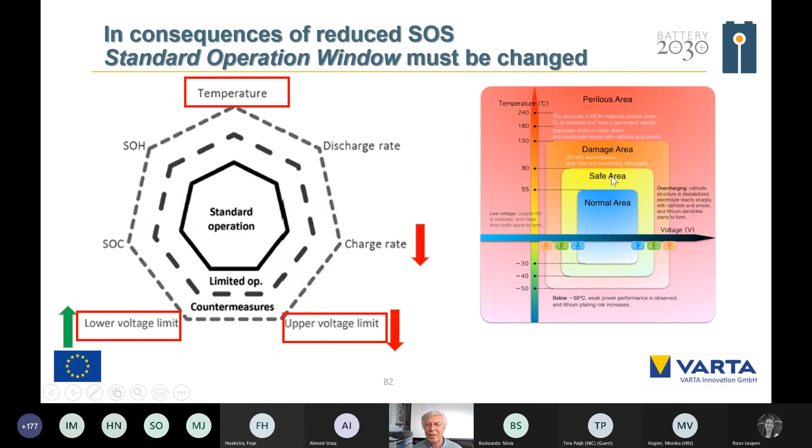Summary: the main safety problems are electrical, kinetic, chemical, and mostly thermal. The cell's energy content, chemical to electrical, is about 3 to 1, and the chemical energy must be thermally triggered, and will be thermally triggered by a short circuit of the electrical energy.

The aging influence on safety includes capacity and energy loss, SEI formation, plating, dead lithium and dendrites, and this depends on the aging reactions, which are influenced by different operating parameters. Because of that relation between aging and the operating parameters, we could find improved or reduced safety states. The standard operating window has to adapt with age, and that is a bit of a problem.